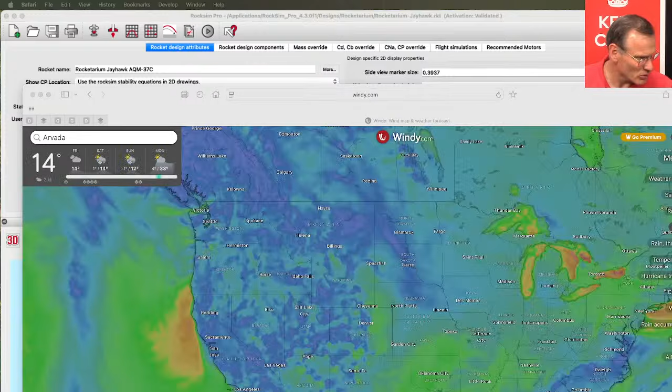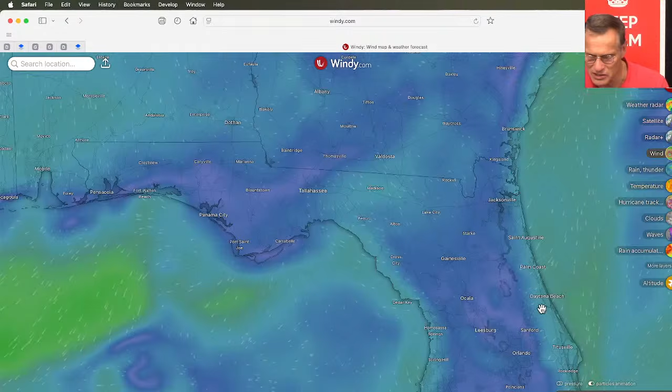Let's see if we can find out. Let me open up a new window here. Let me show you my screen after I get off of this page. Okay, computer screen. So hopefully this is working. Okay, so this is windy.com. And this shows temperatures. So Boise is right here. It's kind of like the bluish green. So they're in the 10 to 20 degree. Oh, it says 32 degrees right now. Yeah, that's warmer than we are. We're at 17 in Denver. And Jacksonville, let's see. Palm Coast, Jacksonville shows 71. Palm Coast is 68. I used to be in Daytona Beach when I went to college. That's 66. Let's see what it is in Miami. 75 in Miami, 77 in Homestead.

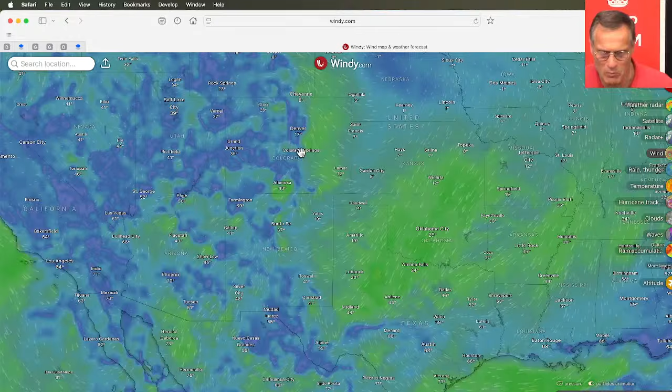I love this website, windy.com. This is great for RockSim because it can show you your wind speeds. So right now, am I showing? We're showing wind. Oh, this is in knots. So right now we're blowing in this 10 to 20 band for Colorado Springs. It's kind of breezy. We got some light snow going on right now.

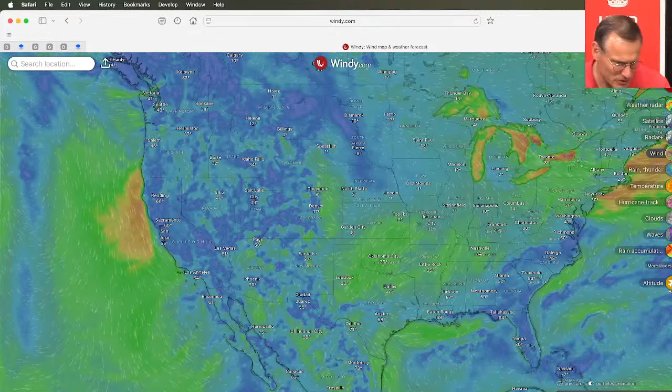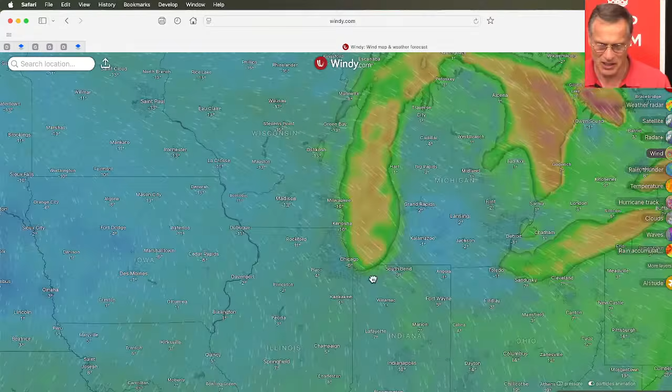Yeah, even 64 in Los Angeles. So it's not so warm there either. Let's see what if I would have gone to Dallas. It'd be 46 degrees in Dallas, so it's still above freezing there. But it was supposed to get icy tonight. So thank you, Richard Ray, and we have Explorer 828, which is David in Michigan. He says 1 degree actual in Michigan, minus 17 with the wind chill. Yeah, it shows -2 in Lansing, -1 in West Branch. I've got family along the lakefront here. Oh, it's pretty cold there. -6 in Chicago. Today's not a good day to be in Chicago. -13 in St. Paul, Minnesota. Yeah, today is a good day to be indoors watching RockSim Live. So thank you for coming.

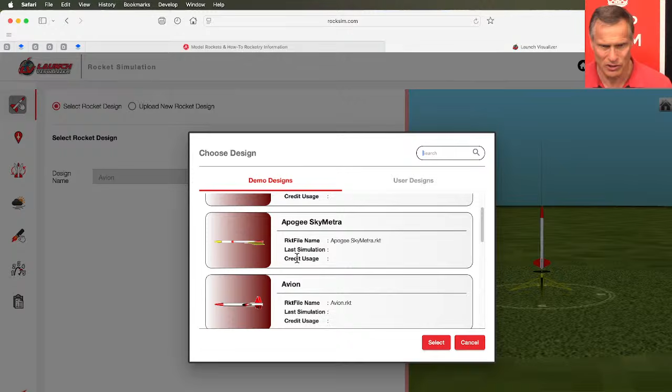So you can't load a new design. Let's see if I can load an old one. I can load that old one. Let's see if I can run a simulation. So I don't know my password. I thought it was on this computer. Let me try. It's typing something, and I'm not doing the typing. My hands are up here, and it's typing. What the heck? Let's see if it works.

Okay, well, I am logged in. Let's see. Choose a design. Avion, select. But I don't think you can upload a design. Let's try to run a simulation. So when you're logged in, you can change where you're located on the map. And so this launch site is in Pueblo, Colorado. It's on the outskirts. The main city is over here, Pueblo.

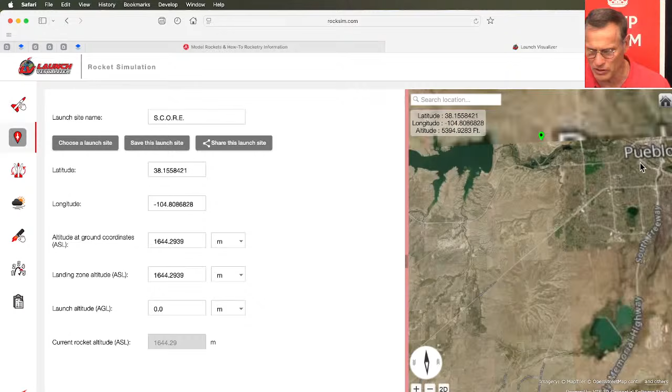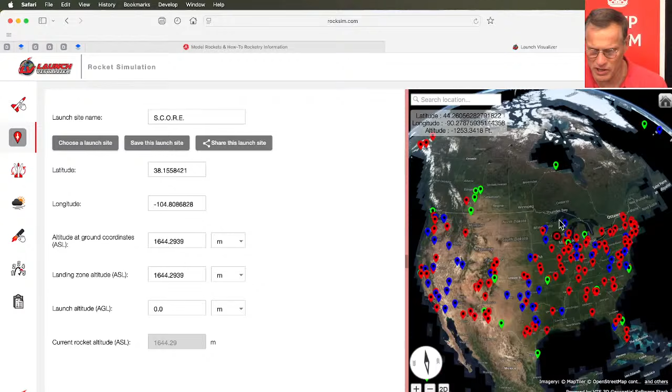And if you're unfamiliar where Pueblo is, it's kind of like south of Colorado Springs and south of Denver. Here's the border of the state. So it's in the southern east side, more towards the central. And all these thumbtacks are launch sites or clubs around the country. The red ones are the NAR, the blue ones are Tripoli, and then the green ones are somebody's personal launch site. Or that one there must be on the other side of the globe. Yeah, it's on the other side of the globe.

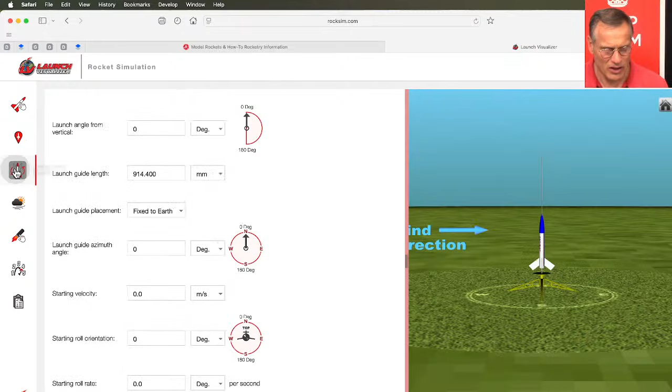So if you are launching in, here's a launch, Michigan, Michiana Rocketry. And if I zoom in, there's their launch site right there, that thumbtack. And, well, that's a tree. I don't want to launch from a tree. So I assume they're launching somewhere out here in the field. So I'll put my launch pad there, confirm the launch site. And then I'll go to the starting state. So we're going to launch straight up. Launch conditions, I'm not going to change any of that.

Let's see if I can load a motor, choose an engine. Yeah, so here's where the bug is. I can't pick a motor. Yeah, so right now the launch visualizer is busted. Pretty much the only thing that you can use it for is getting the launch coordinates of launch sites. I still use it for that myself.

So if you have an account on the launch visualizer and you can't use your account, what we're doing is we're temporarily moving everybody over to RockSim Pro, which does the same thing, except for this part here of finding a launch site. So as long as you have the coordinates, you can put the coordinates into RockSim Pro. But getting the coordinates is a little bit harder. Using the launch visualizer is so much easier.

So if you don't have a RockSim Pro account, email us and we'll give you an unlock key for RockSim Pro, because you're paying money, and so you might as well use something. And RockSim Pro can actually do a lot more than the launch visualizer, other than seeing this map and selecting launch pad locations. So do that and we'll take care of you. You know, you can trust us here at Apogee, I hope, to take care of you.

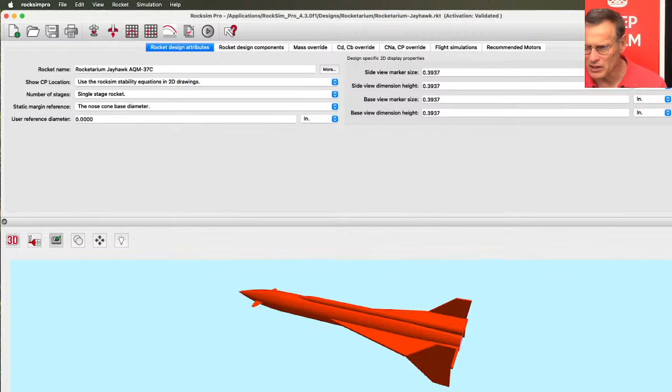So if I open my downloads folder, where's my downloads? Downloads, Journey 75. Okay, so I'm going to open up RockSim Pro. This will work in RockSim Pro, identical. So here's the Journey 75 in the downloads folder, and just take it and drag it onto RockSim. And then it's going to ask me, do I want to save this one? I'm going to say no. Okay, so here is that rocket.

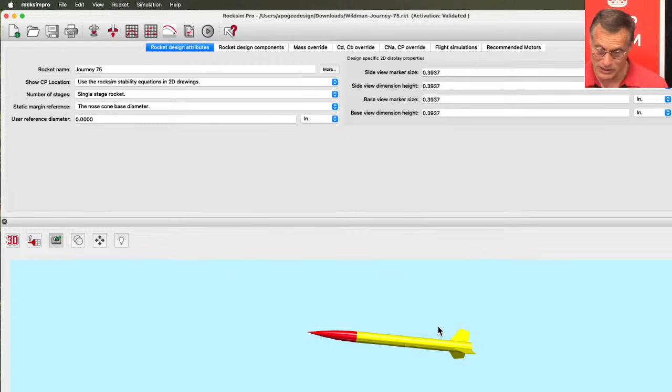So imagine this is your Super DX3. You have to have a RockSim file. So if we look at it in 2D, we see that this item right here with the P, which is behind our center of gravity, is our parachute. So his question is, how do you simulate different shaped parachutes? So let's double click on that, and it highlights it here. So now we're editing the parachute.

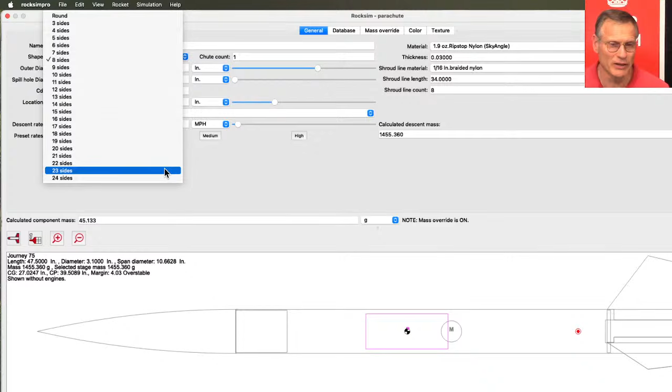So here are the different shapes we can use. Round, a triangle, a square, a hexagon, an octagon, up to 24 sides. So this is how you simulate it. But the image that you see will always be a round, but it will actually simulate the area of these. So right now I'm on an 8-side parachute, and I think he said 4 to 6 pounds, 40-inch. Okay, so 40-inch parachute. So I just changed the outer diameter here, hit the tab key. You can see my parachute enlarged a little bit.

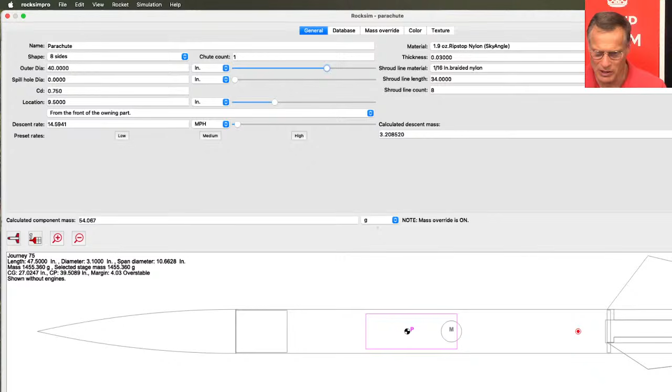So my calculated descent mass, right now it doesn't have a rocket motor in it. So my calculated descent mass without the motor is 1,455 grams, and we'll change that to pounds. So this is 3.2 pounds. Let's add a rocket motor and see if it bumps it up. So I'm going to click OK right here. You don't see the OK button, so there's the OK button. Okay, so click OK.

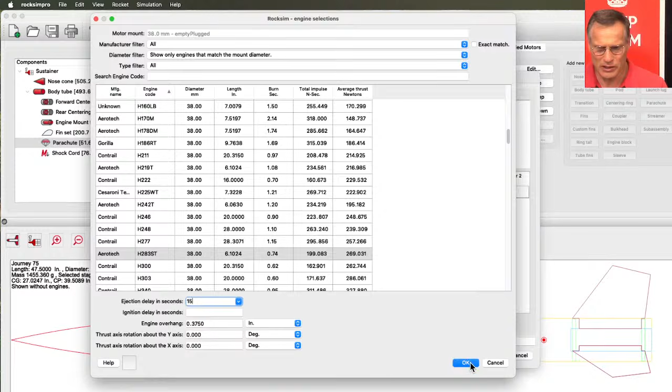Now to load a rocket motor. So in order to run parachute simulations, you need the rocket motor because we need the mass of the motor. So we're going to add that. So I'm going to click over here. We're going to choose an engine. And typically, you want to choose as big of an engine that you're going to fly. So on this one, we'll say we'll fly up to an H motor. And I'll just grab an H. I just randomly selected this one. So my delay, I usually pick the longest delay and then hit OK. And then we're going to click OK here.

You'll see that over here on the screen it loaded the motor. And if we go back to the parachute, now we have a descent mass of 1605. Before we were in the 1400s. So now we're at 3.5 pounds. So you're going to adjust the weight of your design, make sure everything is okay to get the same mass. And then it's just a matter of running simulations.

But on this screen right here, it's already pre-calculating the descent rate. So based on this descent mass and this size parachute and this shape parachute, my descent rate is 15.32 miles per hour. That's fast.

And so right here we have 3 buttons: low, medium, and high. These are preset descent rates. And if you click on them, watch this number change. So a medium descent rate, which is kind of like an average descent rate, we click on that, you'll see that a medium descent rate is 8.9 miles per hour. And so previously we were at 15.

So if I went to a high descent rate of 10 miles an hour, we're pretty high, and that's using a 60-inch parachute. So when I click these buttons, what changes is the outer diameter. So if I go to a low descent rate, now we're at 7.89. Okay, so something didn't change. My outer diameter should have changed. It didn't change. It changed before because it was set at 40.

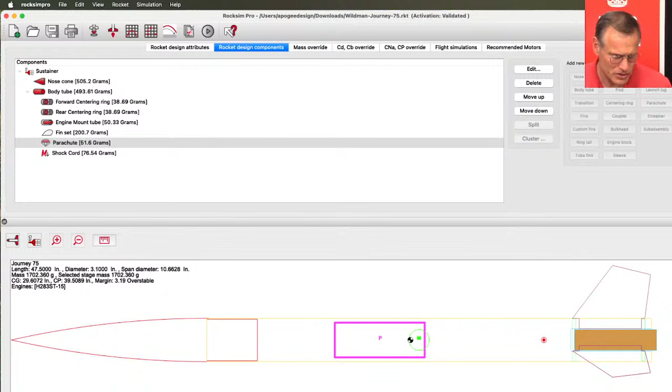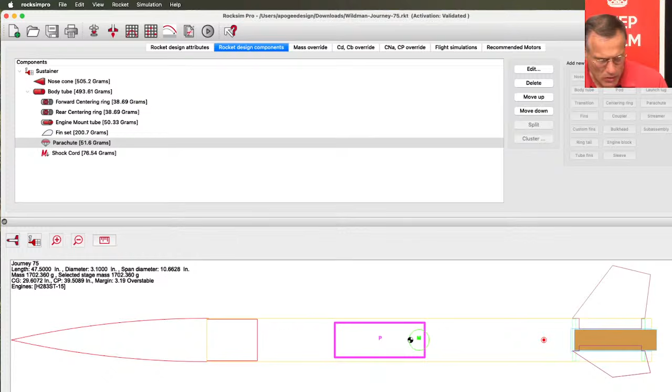Dr. Disco in Austin, Texas says, recently got a kit that does not have a RockSim file. I dove into RockSim Pro and created a model from the parts. Only thing I struggled with was the fins. Okay. He didn't say he had a question. Okay, he says that the rocket is a Vaughn Brothers Extreme 24. Well, I'm not going to search for a RockSim file because if you didn't find one, I'm not going to find one. So what we'll do is we'll take this one right here.

We'll delete the fins. So you highlight them here, highlight them up here, and hit delete. It's going to ask, do you really want to delete? And I'm going to say yes. Okay, so Dr. Disco, what we're going to do is add a fin. So to add a fin, the first thing you got to do is select the component it's going to be attached to. So I'm not going to attach it to a parachute. I'm not going to attach it to the nose cone, although you can.

Typically fins are attached to outside tubes. So this is an outside tube. So then the fin buttons all line up. So there's 4 different fins. There's the regular fins. So regular means trapezoid or elliptical. Those are your 2 options. Custom fins are flat fins, but they can have any shape, including trapezoid and elliptical. But it could be anything.

It could be, you know, an octagon or a bat wing or any shape that you can think of that you can print on a piece of paper and cut out. That is custom fins. That's the most useful one. Ringtails are a ring that goes around the outside of the tube, and that ring acts like a fin. And then tube fins, instead of going all the way around, it's a tube strapped onto the outside of the tube, and then you do multiple tubes, and you can make a stable rocket like that as well.

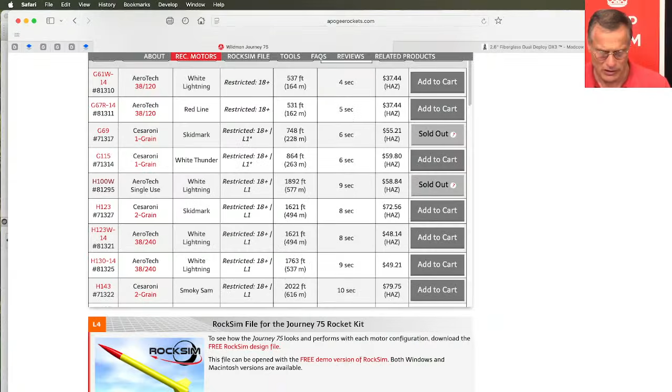But so this is not a trapezoid, so this is a triangle. So we can't use the regular fins for that. We will have to use custom fins. So select the body tube, come over here to custom fins, click on that. And the first thing it does is it tries to find a fin from the database. Typically, you don't know what these look like, so it's anybody's guess. So I'm going to cancel out of the database. And then it takes you to this screen right here. This is the editor screen. Let me make this as big as we can so that...

And when it creates the editor screen, it throws an imaginary fin out there. And what it tries to do is to make sure that the rocket is stable. So our center of gravity is right here, and the center of pressure is back here. So this is a stable rocket. And we have a motor in there, so we definitely know it's stable.

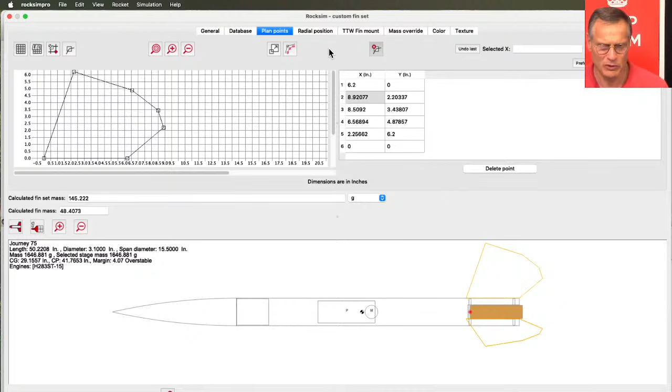So I can remove that one, remove that one, remove that one, and look, now we have a triangle. So now it's just a matter of making this triangle look like this triangle. So why does it do that? Always does that. I don't want to do that. Okay, so basically we need a longer base on our triangle.

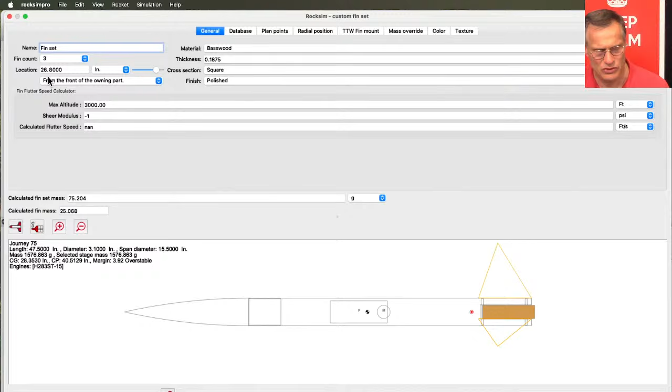So currently, if you come over here, okay, it's plan points. I want to just see where the location of this fin is located. So the location is 26.8 inches from the front of the owning part. The tube, remember, is our owning part. So from the front of the tube to where the fin starts is 26.8 inches. So now we want to make this longer. If I make it longer, my fin is going to hang over the edge of the tube.

So the first thing I'm going to do is change the location reference point from the front to the base. And when we change that, now it's located 0 inches from the base of the owning part. So now it's looking at this point instead of that point. So if I make the fin longer, the base is going to stay the same place, and it's just going to extend it up the tube.

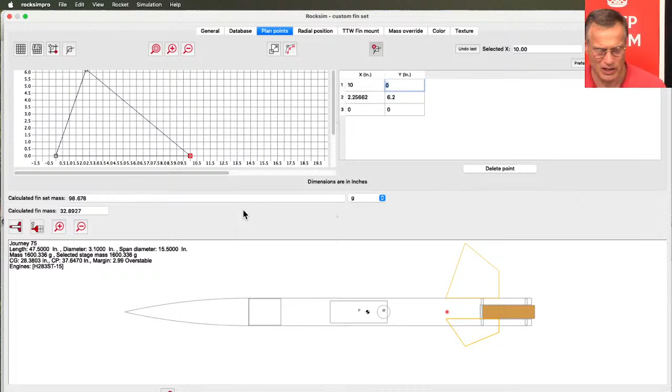So I'm going to go back to the plan points, and then I'm going to grab this point right here. I want to change you. It won't let me change you. You can always come up here to this one, double click on it, and let's call it 10 inches. And then hit the tab key, and it jumped out to 10 inches. So now it's really long. And why did the base change? We still want it here. Okay, so now it jumped back. It just kind of had to recalculate.

Okay, so now we want to take this point up here. I'm still trying to delete that. That's what was going on. I had the delete button still checked. So now I can move this point. So now I'm going to grab this point here, and I'll move it here. So now we're getting pretty close. I think it needs to be a little taller. All right. And that's it. We've just created the fin.

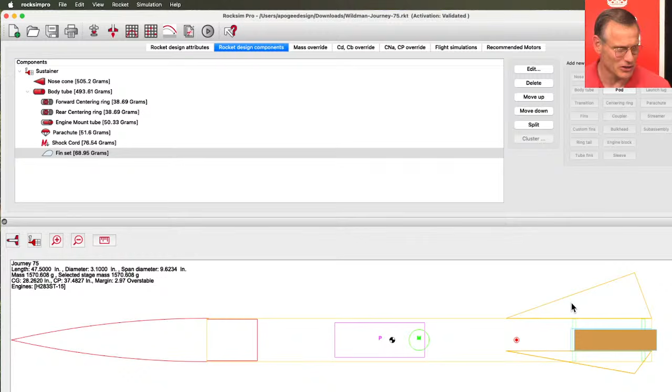If I click OK, it takes us back here, and you can see our fin is now designed. So again, you go to the fin set, go to the plan points, and you can add points. You can drag points around. And you can create any shape that you want. I like that fin shape. Except I don't like that point right there.

And these are the coordinates of the points. So if I click on that point right there in the chart, it highlights it so you know where that point is. And then you can always tweak these dimensions. So if you want to make it exactly 4.5 inches, type in the number and then hit the tab key. So if I make this one 2.6 and hit the tab key, it'll jump down. And you can do this to all of them just to make sure all your numbers are nice round numbers if you want.

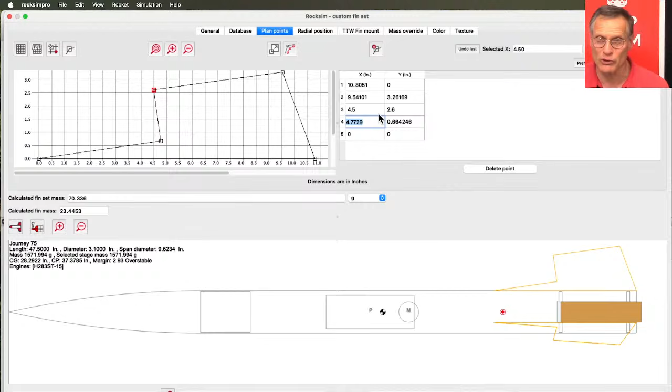There's an undo button here. You'll undo the last thing that you did. There's preferences. These preferences are for colors and things like that. So there's the grid size. Here's the y-axis. Here's our colors.

So our background color is white. I can change that to blue. Click OK. And now we have a blue background. I don't like that, so you can undo. Well, I guess you got to go to preferences. Go to fonts. Background color, white. So you can change the point colors, the line colors, the grid color, the label colors, all that good stuff.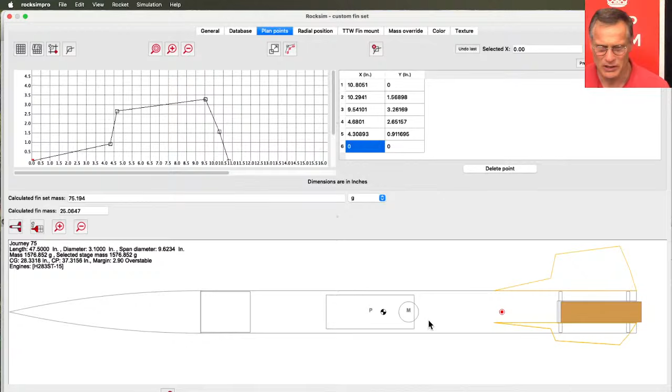So that's your custom fin. So you can't make that shape using the simple fins, the regular fins. So this one right here, again, it always looks in the database. It added the blue fin. Let me change the location so you can see. Here I got a root chord length, which is what attaches to the tube. The tip chord length is way out here. That's this length.

The semi-span is how far the tip is away from the root. And then you have your sweep length and sweep angle. These are actually both the same. They control the same thing, when you sweep the fin. But I'm limited, when I'm using the regular fin set, it's got to be 4 points, and these have to be parallel to the tube.

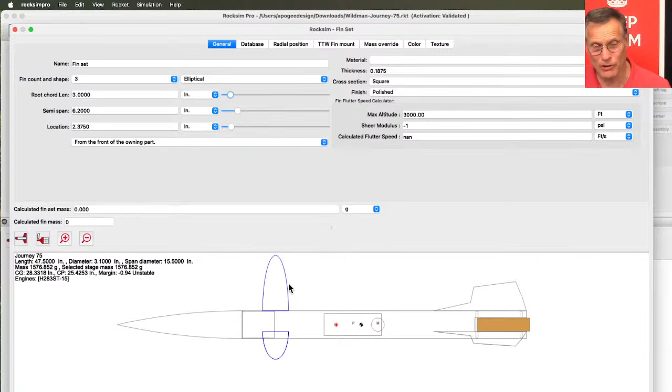You can also make an elliptical. And then you can change the root chord length. You can't sweep these like we could with the trapezoid. If you want them swept, then you do have to use the custom fin editor and put them in as points. So anyway, I hope that answers your questions.

And Dr. Disco says, and that is exactly what he did after a bit of trial and error. Well, that's good. What happened to my RockSim? Did I accidentally quit? No rocket design file, open recent.

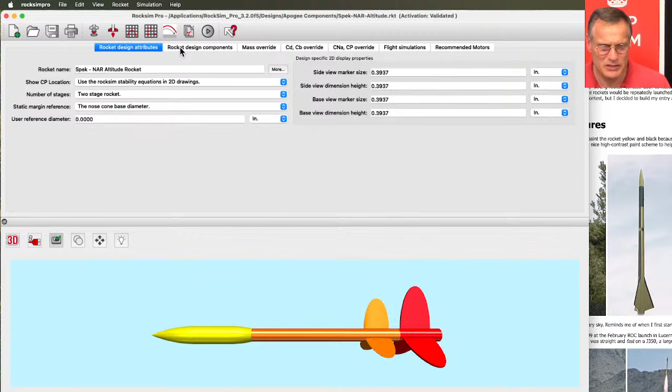Okay, so here are elliptical fins, and it shows these as regular fins. So the icon here is different for the regular fins versus custom fins. So a custom fin will kind of have a rounded edge on it. Okay.

We still got plenty of time, and I don't have any more questions. So, yep, come on, give me some questions.

If you're brand new to RockSim, let me see. I don't think I did my intro on where to find information. So if you're brand new to RockSim and you're looking for information, come here to How To and Guides. Come down here to Software. Click on Software, and then over here you'll see there's RockSim How To info. So if you click on the video tutorials, there'll be a whole bunch of videos.

So like video number 9 is how to create a new design. I would recommend going through at least these first 10 or 12 in order, just because it kind of sets you up on how to move your way around the screen and change things. But eventually you're going to want to design a rocket, and then you get to video number 9.

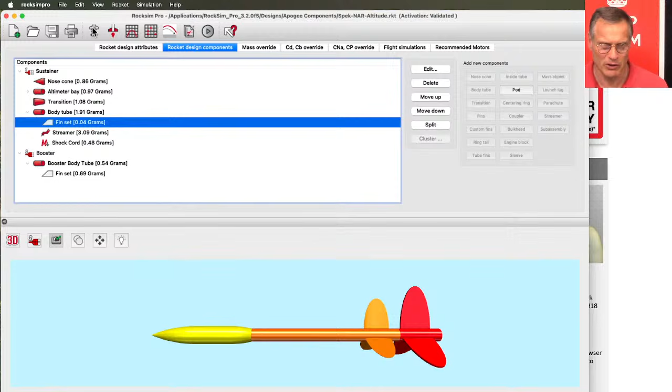So the very first one is, okay, let's just open RockSim and just run a simulation as fast as we can. You're going to have a rocket, and you're going to come up here to this button right here. This is our Prepare for Launch button. And this shows you we need to make engine selections. That's our first thing. And we're just going to move along those tabs.

And this is a 2-stage rocket, so I can see my upper stage, and that's this icon right here. This one down here is the booster stage, and you can see it's lower than the upper stage. So then to pick a motor, you can either highlight the row and hit Choose Engine, or you can just double click on the row. I guess it did crash. Finally getting the report. So now we can select a rocket motor.

This was the upper stage, so I'll do an A3-6 in the upper stage. Click OK. So that's my upper stage. In my lower stage, I'll select that and then hit Choose Engine. This time I want an A10-0. Click OK. So now we have our engine selected.

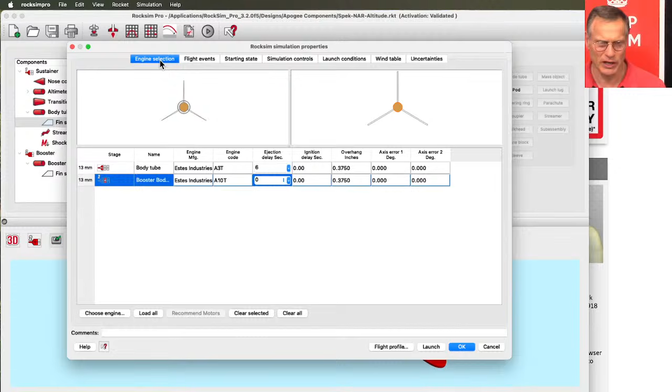Our next tab over is the flight events. This controls the recovery system. So in this particular rocket, it's telling me all I have is a streamer, and I need to select a criteria, and we're going to say deploy the streamer at motor ejection delay. So our ejection delay for the upper stage where the streamer is, is 6 seconds. So at 6 seconds after motor burnout, it will deploy a streamer.

Our starting state is sitting on the launch pad. So you look here, we've got a launch guide length of 96 inches, and that's kind of long. That's for a high power. So we'll make it 36 inches for a small rocket like this one. Hit the tab key and it jumps down to the next one.

This is our launch guide angle from vertical, and right now we're launching straight up. There's this slider bar or wheel over here that controls the launch angle. I would keep it on the positive side and not on the negative side, because it can cause confusion, because the next one down is the azimuth angle. So the azimuth is like a compass direction.

So when it's pointed straight up, that's north, and when it points straight down is south, and this would be to the east, and this is to the west. And you can see the numbers change as I move the wheel around. So to the east is 90 degrees, and you can type in a value here if you want. So right now I am launching at an angle of 2 degrees towards the east.

But if I make it a negative number, now instead of going east, I'm going west. And so that can be confusing. So just keep your launch guide angle as a positive number instead of a negative number. And you want to keep it under 30 degrees from vertical. So here's 15 degrees from vertical.

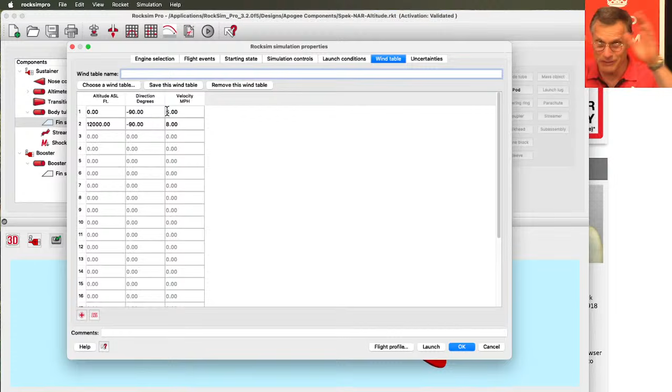This shows us our wind, and again, this is a little bit advanced. I think when you start, they're both set to 0, which means no wind, which is fine. And then you can do a launch or a flight profile. So if I did a flight profile, this is going to go really quick. Yeah, it went really quick. Right here, it shows that this rocket crashed. And the reason it crashed, and it's going to load the map.

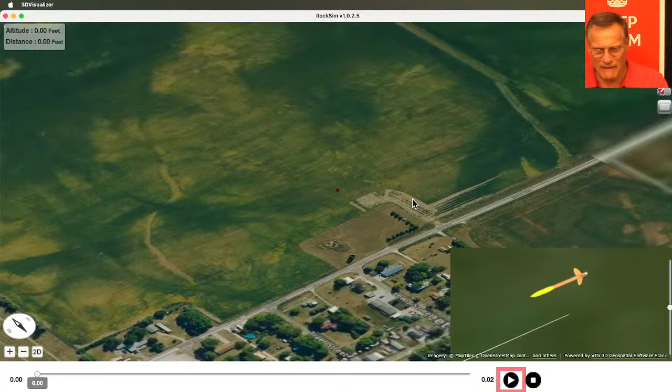Let's see. I've got to see if I'm seeing the whole screen here. Okay, so let me zoom out. I don't know where this launch field is, but it's a nice field.

It's along a road. But my rocket is on the ground at a 90-degree angle. So when it launches, it's not taking off. It's going sideways. So basically, this rocket just crashes really fast. So to change that, imagine you're in an airplane. I'm just playing around right now because I don't have any questions.

Oh, Low Budget Bob says, you missed a question: what dictates the CP of a rocket? Okay, I'll come back to that one in just a second, because we can talk about that one after I got you hanging on this simulation of launching from an airplane.

So to change this simulation from launching on the ground to launching in the sky, we have to change our starting location. Right now, the altitude that the rocket starts at is 227 feet above sea level, and the landing zone altitude is 227 feet above sea level. So you have to change this number right here. Let's make it 5,000 feet above sea level, and the landing zone altitude is still 227 feet.

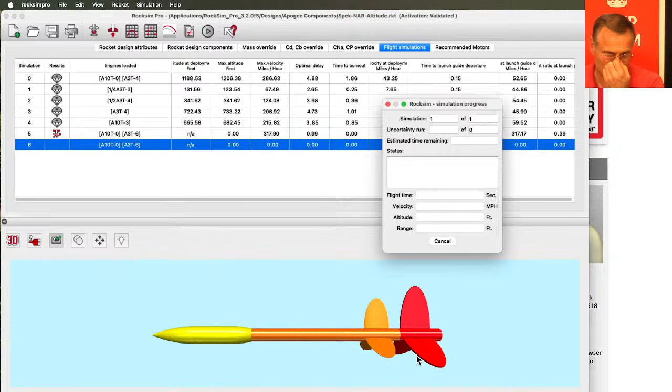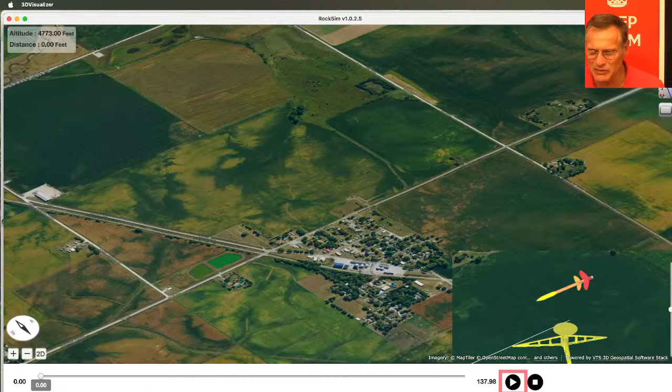So now when we do flight profile, altitude at deployment was 4,200 feet. We're still aimed down. But let me go to this one right here, the trajectory view, because it's a little easier to find where the rocket is. I don't know where my rocket is, but if I click this button right here, it will find the rocket. It found the rocket right here, this red dot, and that red dot is 5,000 feet above sea level.

And if you look here, we're actually aimed straight flat. There's our rocket right here in the sky. When we launch it, let me zoom out a little bit so we don't lose our rocket, just in case it goes far. The rocket is moving, you can see it's starting to go down. Gravity is affecting it. Then the streamer came out, and there's two lines. This is our booster stage tumbling, and this green one is the rocket coming down.

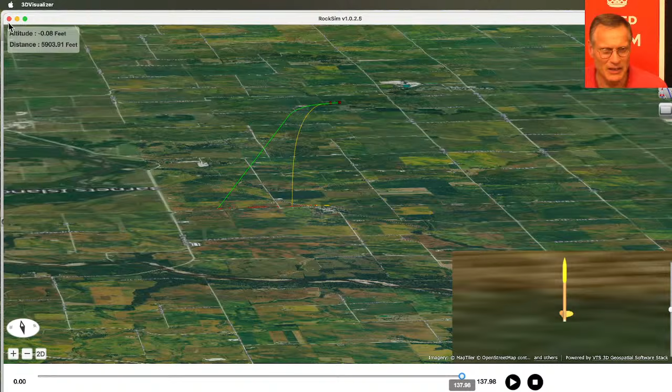We're at 17 seconds, and this is going to take almost 3 minutes, 2.5. The booster landed right here, and the rocket is still drifting way out there. So that's how you launch rockets off of an airplane. I think when we set it up, we gave it a starting speed, didn't we? Yeah, 300 miles an hour. Let's change it to 0 miles per hour and hit flight profile, and see how the trajectory changed by saying we're not moving.

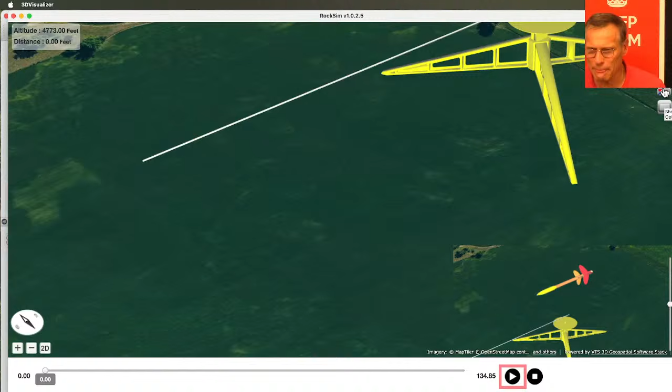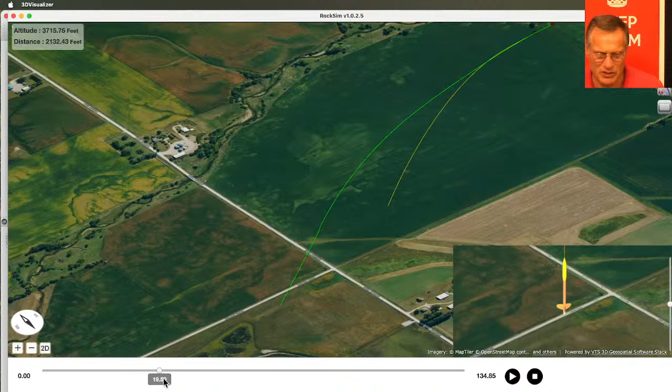I'm going to go to this one and find my rocket. The rocket must be like right there; you can't even see that green dot where my cursor is. I launch it. So now it's 134 seconds instead of 137. You can see the rocket took off really fast, and it's starting to drift downwards. So the trajectory kind of looks the same.

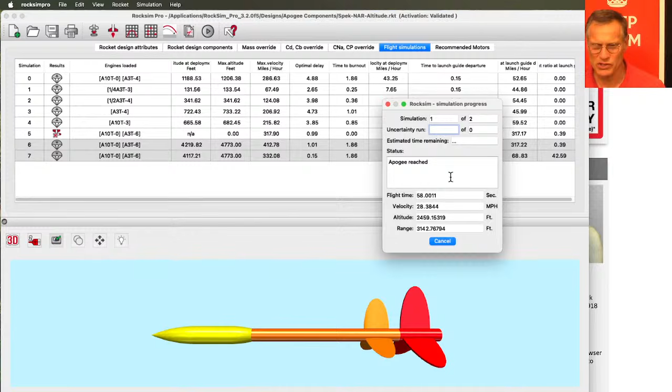But we can compare trajectories. You can do this in RockSim Pro, it's kind of a neat feature. You select both of these, and then you hit the flight profile button. It says the selected simulations have different launch sites. These are identical. Show the launches with different locations. Okay, so it's running the simulations; it has to run it twice.

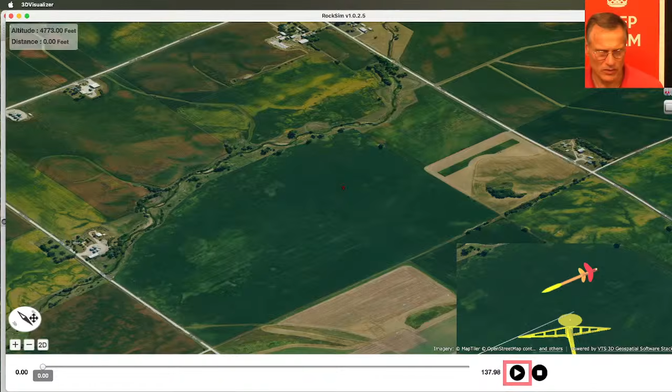Now it's going to show us, go here to this view, and this dot here is the rocket. If we launch it, okay, it started out the same. There's two green lines, and now it's a matter of figuring out which green line is which simulation. It kind of looks like fireworks, right? This one should be a yellow line because I know that's a booster stage. And which of these is going to hit first?

Okay, so this one hit first. That was the second simulation. So by not moving at 300 miles an hour, the rocket hit the ground faster. It's because you had 300 miles an hour of velocity going this way. That makes a difference in the trajectory.

So the question that Low Budget Bob asked, and everybody's answering for him: what dictates the center of pressure of a rocket? D. Hagen 6278 says basically the geometry of everything in the airstream: nose, airframe, fins, tail cone, launch lug, rail buttons, surface finish to a lesser extent. So, yep, that is correct.

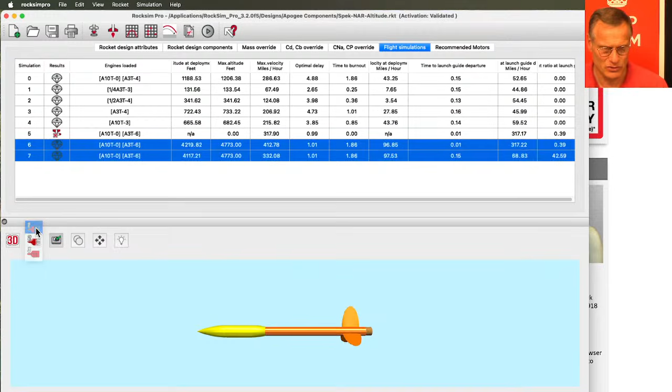Because body tubes don't create any lift force unless they're at an angle of attack. So technically they do, but it's so small that for all intents and purposes, they're ignored. So let me change this rocket to just a single stage. Let's look at it in the 2D view. And so the center of pressure is right here.

So we can change the location of that center of pressure by changing anything on the outside. So I can change the nose cone, I can change the transition, or I can change the fins. I have a tube right here. This is not going to affect it. And this tube right here is not going to affect it. And then anything on the inside of the rocket doesn't affect it. The stuff on the inside affects the center of gravity, not the center of pressure.

So center of pressure is where the aerodynamic forces are balanced. And there's 4 forces acting on a rocket. 2 of them are aerodynamic. So the 4 forces are lift and drag, and those are the 2 aerodynamic forces. And the other 2 forces are thrust from the rocket motor and gravity from the earth. So those are the 4 forces. So this tells me where all the aerodynamic forces balance. So that's where our lift and drag balance.

And the center of gravity is where the gravity force is balanced. So if you balance it on your finger, that's where gravity is said to be concentrated, because it will balance at that point. For a rocket to be stable, the center of gravity must be in front of the center of pressure. That's the definition. That's what's going to make the rocket fly straight. If this center of gravity gets behind the center of pressure, then we have an unstable rocket.

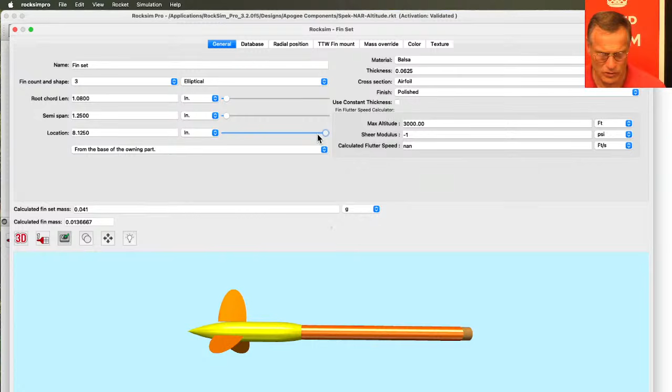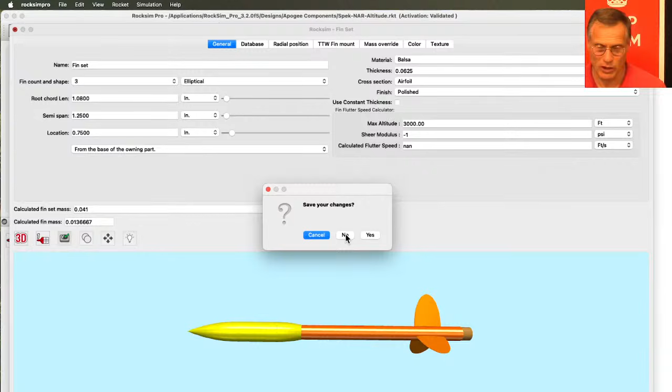So if I look at it in 3D, you'll see that they're, let's see if I can get them to conform to the tube. Doesn't want to. But you can actually put fins on the transition, and you can put fins on the nose cone. You can put fins on the tube just by moving the location. It's just where you're measuring from. So that is what controls the center of pressure on a rocket.

Very important that the center of pressure must be behind the center of gravity. The distance, not so important. The distance affects how much weathercocking the rocket's going to do, but I would rather have more weathercocking than having it on that hairy edge of stability, where the center of pressure and the center of gravity are so close together. I want some distance in between. And typically you want the distance to be at least one body tube diameter. And in this case, the body tube diameter is this one right here, because we're using the maximum frontal area.

AB Hobby says, I am building a rocket with a 38 motor tube. I would like to fly with a 29 millimeter motor adapter tube. How do I make the 29 millimeter motor adapter a subassembly and use it in flight simulations? Okay. Let's open up a rocket with a 38. So let's go to File, Open.

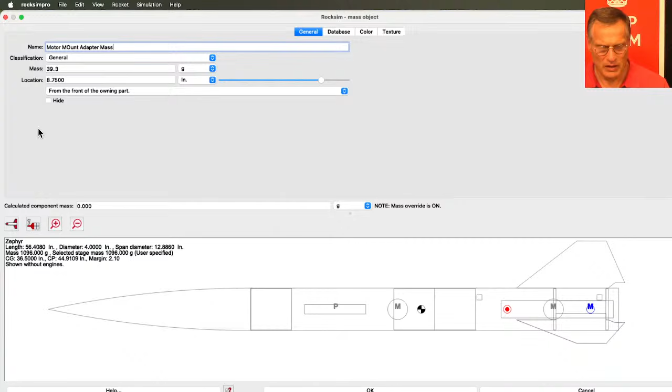And then I need to select the location. So right now, the location is from the front of the owning part. So this tube right here is the owning part. So that's why it's right here. We just want to slide it back to where we think it's going to be inside the rocket. So here is the mass. And I'll just click OK. Let's call this motor mount adapter mass. And click OK. So there's the mass.

And then to run a simulation, just come up here to run the simulation. And so now we're going to choose an engine. So right now you'll see that it's looking for 38s, but we want to put a 29 in. So come up here to the diameter filter and choose show only the engines that match the motor mount diameter, and matching would mean 38, or are smaller. So now we can choose smaller motors. So we're going to sort by diameter. Just click on the column header and that sorts it from the smallest to biggest.

And we're going to come down to the 29s. And then you want to select your 29 millimeter motor. Let's say we've got an H motor. So I'm going down to the H's. So an H135, 29 millimeter motor. 14-second delay. Click OK. Flight events, let's say max ejection delay, so that's going to be 14 seconds. That might be too long. We'll find out here in a second.

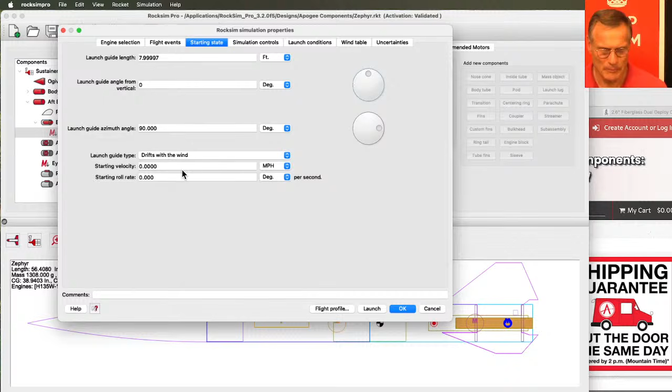This is a 38, so this time we do want to use a 96-inch launch rod, which should be 8 feet, 7.9999. We do want to launch it straight up, so it's 0 degrees. Fixed to the earth. Launch conditions, so now we want to go 227 feet above sea level. And our wind table, so we got an 8-mile-an-hour wind, hit the flight profile. So now we just ran the simulation with an H135, which is a 29 millimeter inside a 38 millimeter motor mount. And that was how quick we did it.

So there's our rocket sitting on the pad. And when we launch it, it's going to be in the air for 74 seconds, so I think the parachute did come out in time. It's going to go over the top. There's where the parachute popped out, and then it's going to drift down to the ground. And it landed in the cemetery.

Okay, so there's the trajectory of our rocket. So the launch point was right here. It went up, kind of waffled around a little bit. At 14 seconds, the parachute came out, and it came down right here. All right, so that is the quick and dirty, easy way to do it. And it's going to be just as accurate as building a subassembly. Do I want to build a subassembly really quick?

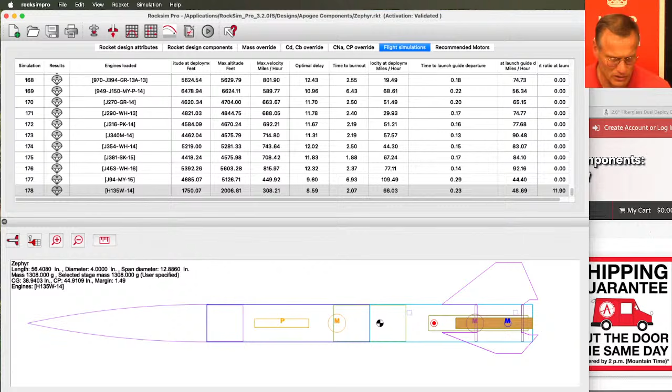We got one more question. Simulating an Estes Pro Series Majestic, RockSim Pro shows the 29 millimeter Estes motor is recommended as not safe. I think it's too slow coming off the rod, even the 6-foot rail isn't long enough. Let me do this Majestic question, and we're already after 3 o'clock, so it can't. Remind me next week to do subassemblies, and I'll build a subassembly. It takes a little longer. It's a little bit more complicated.

That's why I like using the cheat of just using a mass object, because it doesn't affect the aerodynamics. It doesn't affect thrust. It doesn't affect the drag force or lift force. The only thing that it affects is gravity. So we accounted for that by adding a mass object, which is the weight of the item. And then we just ran a simulation by picking a skinnier diameter motor.

Okay, so we're doing an Estes Majestic. Just Majestic rocket.

And I'm going to do a RockSim file. See if one pops up. RockSim design file. Okay, so here's what it looks like. You can download it here, so I'm going to download it. It'll allow that. Okay, so it put it in my downloads folder.

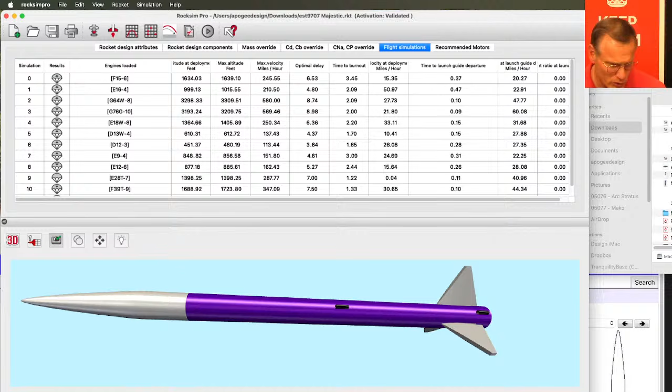Okay, so he says, I got the rocket from Rocket Reviews, and it was seen as modeled correctly, but didn't check the weight of every component or anything. I don't have the rocket built. Okay, so if I look at it in 2D, I can see what the mass is, 201 grams. I don't know, that doesn't seem out of the ordinary. So, you know, you'll build it and you weigh it, and then you'll be accurate.

So let's do, okay, so the 29 millimeter Estes motors. So let's go find the motor. So we're going to go choose an engine. And this time I want to select only motors that match the motor mount diameter. So now it's selected only the 29s. And then I want to scroll down to the Estes section.

So we have an E16 or an F15. So here's the bigger motor. I'll select that. Ejection delay, I'll choose the longest one. Engine overhang, I'm going to say it's 1/2 of an inch hanging out the back. Click OK. You'll see that it loaded the motor back here.

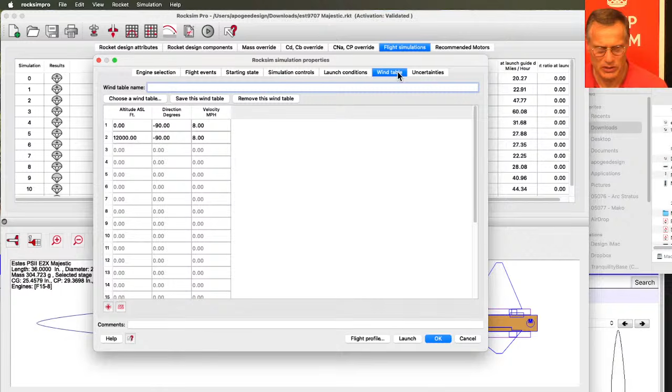Flight events, starting state. Let's see, he said he had a 60-inch launch rod, 72-inch. He had 6 foot long. Launching straight up. Launch conditions, that same launch site, wind table, still 8 miles an hour. Let's do a launch. Okay, so it shows that the rocket crashed. So that typically means that the 8-second was too long. It did reach 1,559 feet.

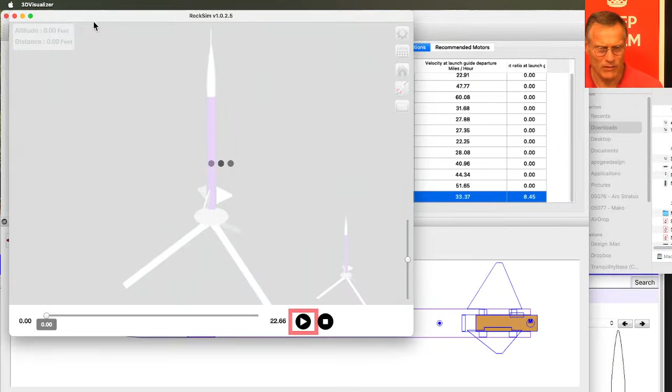What I'm looking for is velocity at launch guide departure, which should be this column right here. And it shows it at 33 miles per hour. And I would say that's okay. So my opinion is that this rocket would be safe to fly on the F-15. It does have enough power, although it's saying 8 seconds is too long. So let's look at the flight profile and see when that parachute lands.

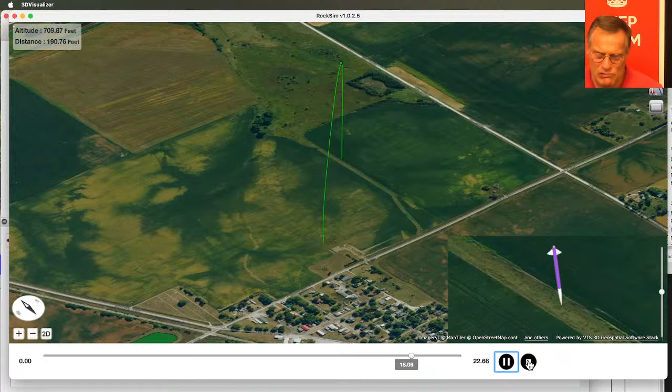Okay, so let's zoom out. So there's the rocket on the launch pad right there where my cursor is. And we launch it. It's only in the air for 22 seconds. So it's going up. It's still burning. It burned out. It's going higher than my screen. It's coming down. So it's starting to pick up speed. That parachute should have come out long before this. This should have been an 8-second delay, which tells me I got something set up wrong.

So I'm going to go back here to the setup. I think under flight events we have the parachute as no event. So we want to say max ejection delay. And let's launch it again. It's still reaching 1,559 feet. But this time it's in the air for 67 seconds. You can see that right here. This is our time.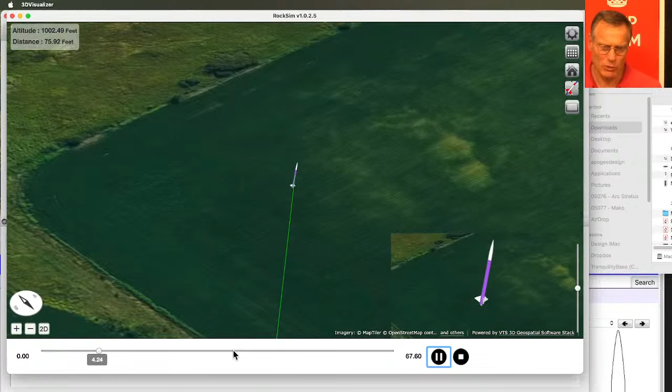And let's launch it. It's taken off, going up. Burned out, so the clock is started on 8 seconds. So somewhere around 10 or 11 seconds, it should pop out the parachute. There it is. And the parachute's coming out. Parachute landed. Let me zoom out a little bit and see what this trajectory looks like.

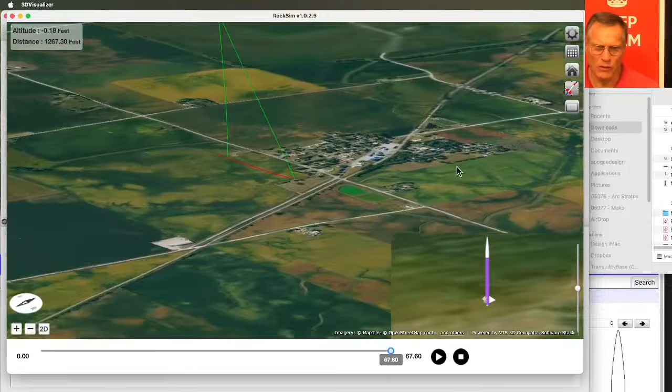So the other thing that I'm going to look at is, did it weathercock too much? Weathercocking means we got a wind coming out of the west. So north is to the top of the screen. So the west would be here on the left side. So we have wind coming out of the west blowing this way. And so the rocket turned or weathercocked into the wind. So did it weathercock too much? And the answer is it was okay.

And the reason I know is because this apogee point, it's colored green. If it was red, that means it's weathercocking too much. I can show the weathercocking cone right here, and I can explain what this means. So if the apogee point is within this cone right here, that's assumed to be a safe weathercocking. It means it's going more up than sideways.

And so when it stays within the cone, it makes that dot green. If it's on the outside of the cone, it would be red. So as long as I see a green dot right here, I'm okay with it. So I'm okay with launching this rocket on the F-15-8.

Now the delay, velocity. I'm looking for velocity at deployment right here, this column. Velocity at deployment, it was 30.96 miles per hour. I think that's okay. I like to see that number below 50. And so it's below 50 miles an hour. So I would say my parachute is probably going to survive.

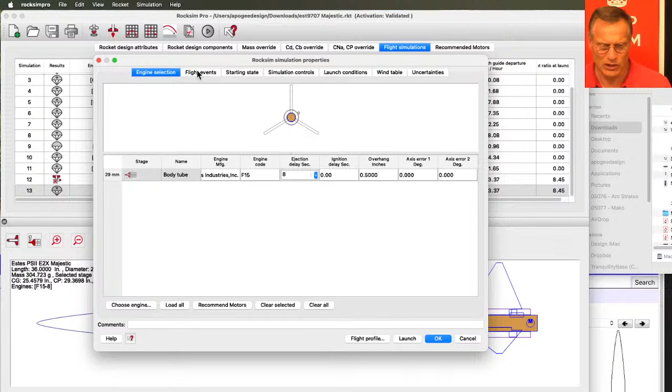So he's saying, I think I used a 4-foot rod, but I tried a 6-foot to check if it was marginal. So this number, velocity at launch guide departure, depends on how long the launch rod is. So if we change the launch rod length, so right now we have a 6-foot rod.

If we make it a 36, which is a 3-foot rod, which is like your standard Estes maxi rod, and we launch that. Okay, so now we're at 20 miles an hour. So that would be definitely no. It's not coming off the rod fast enough.

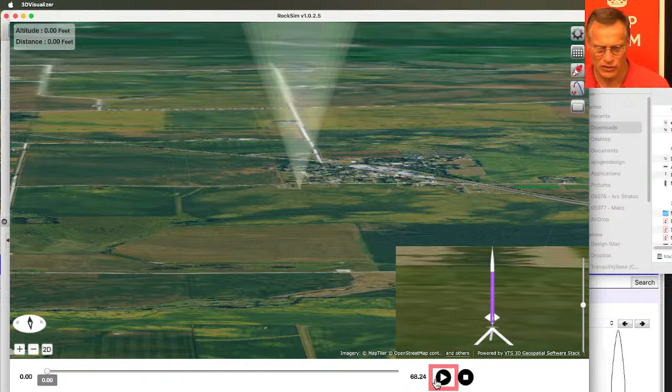So what does that look like if we go here to that flight profile again? And we look at a trajectory view and swing the compass to the north. And now we launch it. Okay, you can see that the trajectory looks a little different because it's not weathercocking as much because it was coming off slower. The rocket kind of got pushed sideways, but it didn't weathercock as much.

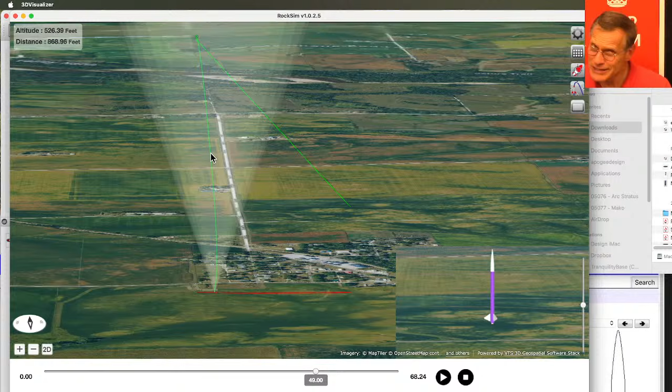So I'd actually be okay with that one too, although I do want to see a higher liftoff speed because it's such a low liftoff speed, you're never sure. So I want to see that number above 30 miles an hour. So I'd like to see it higher than 20. So if I go to a 48-inch launch rod, starting state, 48 inches. So now I'm at 4 feet.

And hit launch. So now I'm at 25 miles an hour. So I'm still a little slow. Better, but still a little bit slow. It's kind of hinky on that one. I would say don't launch it with any wind in that situation, because you never know what the wind is going to do. A wind is a force. It affects lift and drag.

Very cool question, though. It was fun. Yeah, but now we're out of time, so remind me next week to run the subassembly. And then I'll show you how to make that motor mount adapter. That's a good use for a subassembly, but again, it's so much faster just to use a mass object.